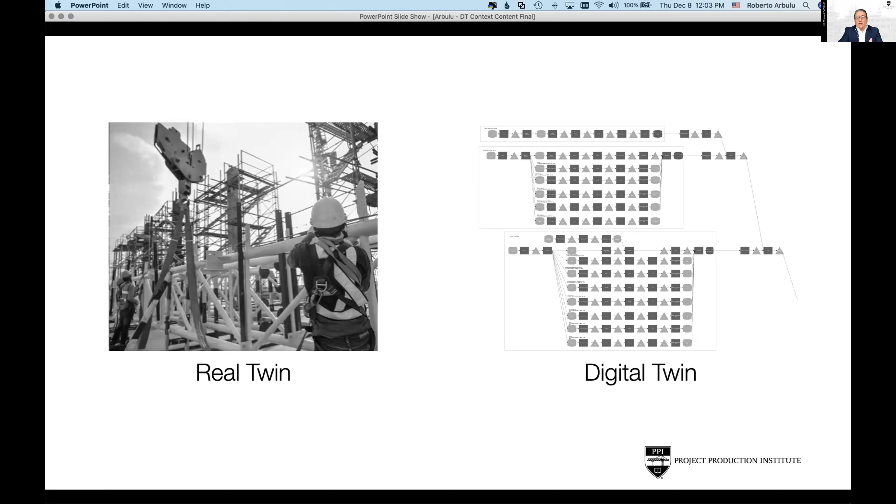We don't have the means in a conventional way, but these days technology is enabling us to really get the concept of the digital twin and make it a reality, digital twin of production systems. So what we're discussing here is a digital representation of one or multiple production systems, the actual production system happening for a project. And a link that is actually a real-time link back to the model, providing an analysis automatically using operation science, for instance, and determining what the optimal behavior should be of the production systems, either before we have an operating process, or during the operation of a given production process.

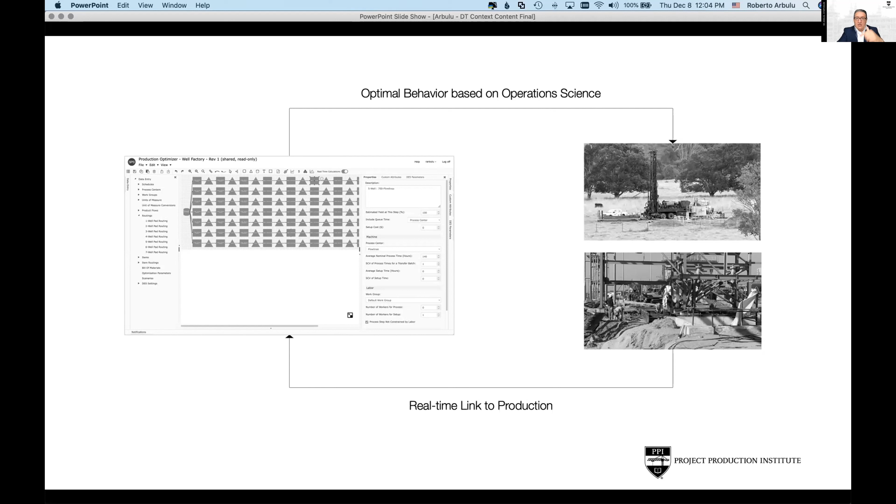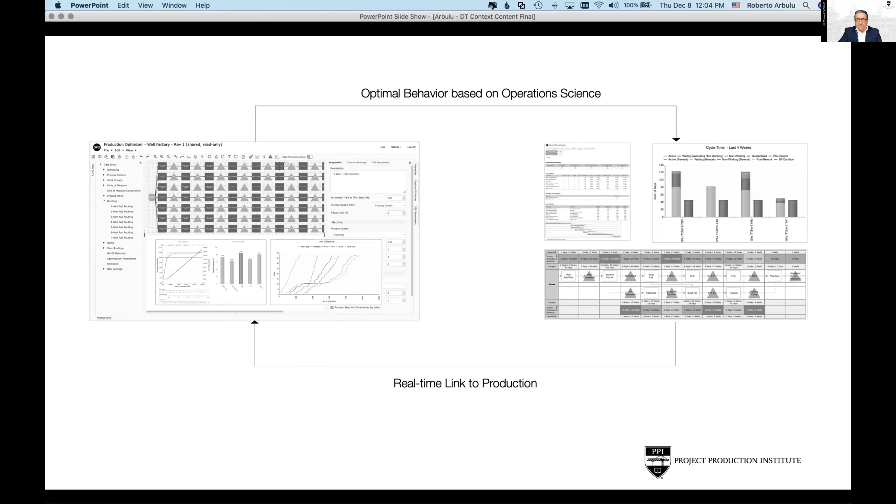Now we will take it to the next level. This is part of the framing I wanted to do for our audience today: because these days we have access to a variety of technology that enables us to capture data about current performance and transfer it, we can now talk about a vision called intelligent production, where we can have production systems that automatically optimize themselves, as long as we have this connection between the virtual and the real production system, using operation science, for instance.

This could be technology attached to pipes, could be technology attached to the Internet of Things. And then we get closer and closer, as Gary mentioned in his opening remarks, to the idea of a digital twin of project production systems. At the end, we're talking about having a model, something we can visualize of what that production system is, and once again, using technology as a means to connect it and have a virtual digital twin of the production system.

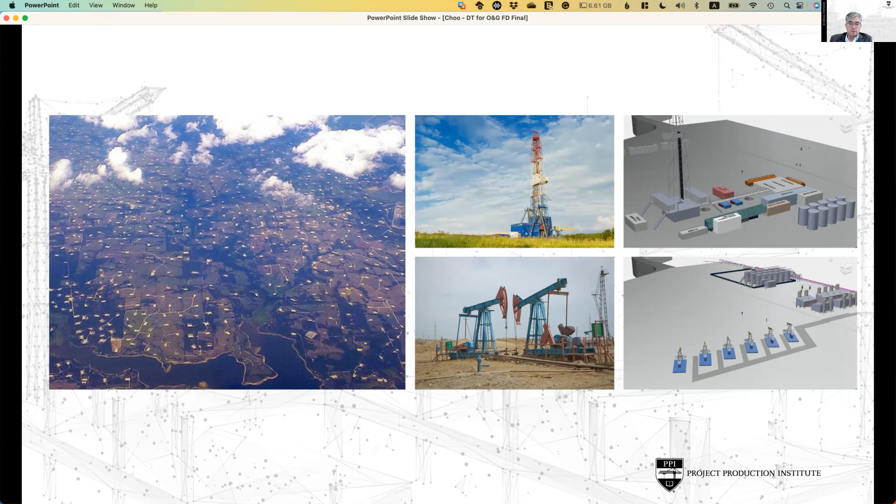The digital twin is very much focused on the 3D modeling aspect of that work. As Roberto already described, what we mean by digital twin is the actual production process that takes the wells and pads from the planning activity to the point of being put online. This is a very simplified view, but regardless of who you are in the process of developing an onshore unconventional well, this is pretty much the process everybody goes through.

This could be broken into three different steps depending on the different rigs you use. You can have multiple completions processes, multiple hookups, and then the main pipeline as a separate item that gets connected to the site. But generally, this is the process that all onshore field development organizations go through.

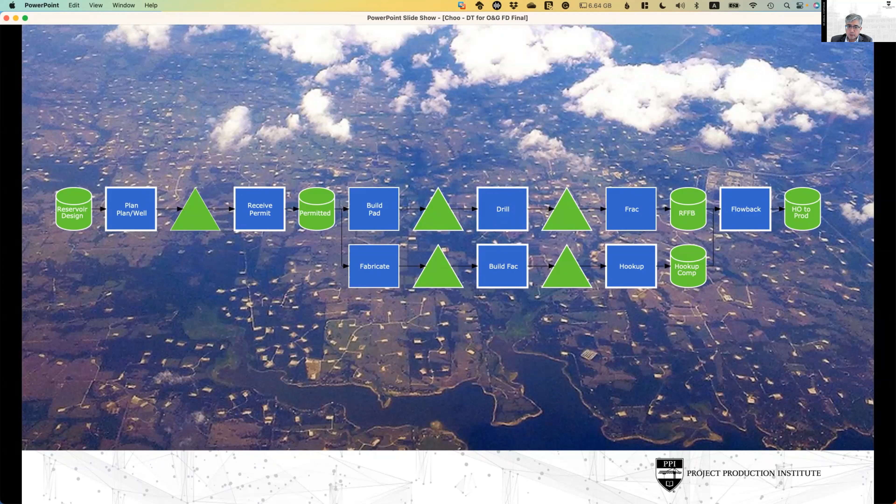So we can say that's the model of the production system. One of the benefits of making that model is to understand how we want that production system to behave, and use the actual information of how the work is getting done to inform the model. So this can be a living system.

For example, if you know the duration, the capacity, the resources you're going to have, then based on the number of wells you're trying to put online that year or future years, you can determine the WIP targets, stock targets, and required number of resources to achieve that output. That becomes something you're using to control whether you're ahead or behind in terms of your WIP—not in terms of time, but above or below in terms of your WIP and stocks.

Now, this is something we all talk about a lot—there are many organizations and systems out there that focus on visibility. And the visibility says how many pads and wells do we have in permitting? How much do we have permitted? How much do we have built?

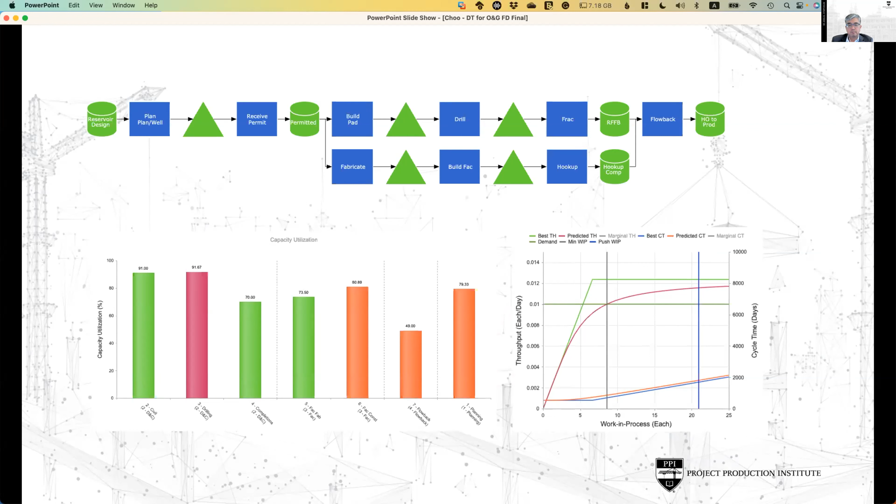Some organizations have said, no, we actually have a pretty good estimate of what we want to come out of it, or let's start with the model and then control to it. Either way, regardless where you start, what you want is now a system that operates in conjunction. By doing the model, you can understand what your capacity utilization actually is, and is your bottleneck where it needs to be, and how much WIP do you need in the system. By having the control element, you're constantly looking at your cycle time, what's your mean, what's the variance, and the median. So that allows you to understand what parameters you want to put into your model, for each of the operations you might be seeing.

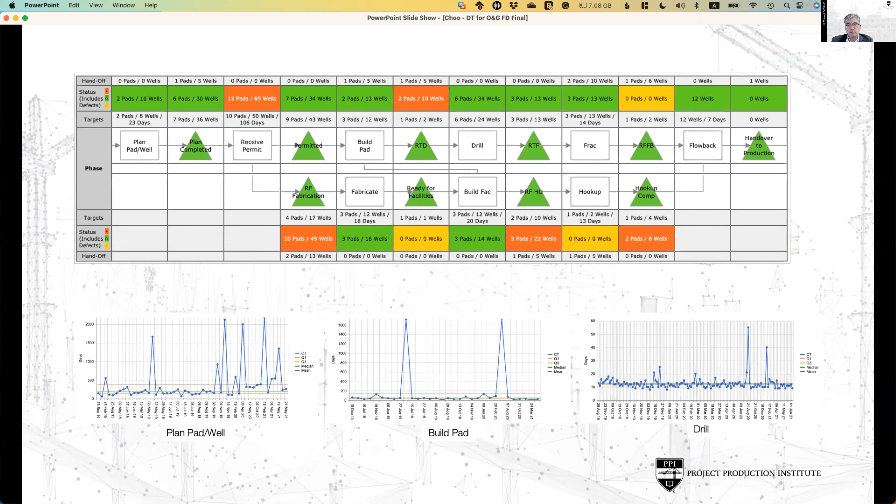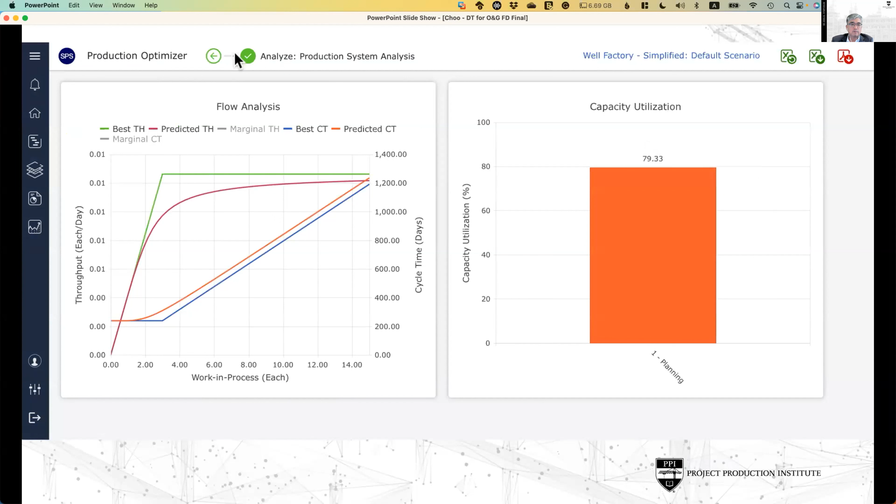One thing we had done in the past is there was a very big effort in creating the model, collecting the data, and then feeding the model and so forth. But what we've been working on with our team is the ability to build the actual modeling and optimization process into the tool that people are using to control the work, whether it be discrete event simulation or analytical modeling, so you're able to see it from one perspective. This is something that's already possible. Whether you're going to use your standard process to do this, or build a model to do this, it's already been integrated so that you can have a digital twin that operates from the modeling to the control and the control to the model.

With that, I'm going to hand it over back to Roberto, and I can answer any questions you might have after other presentations.

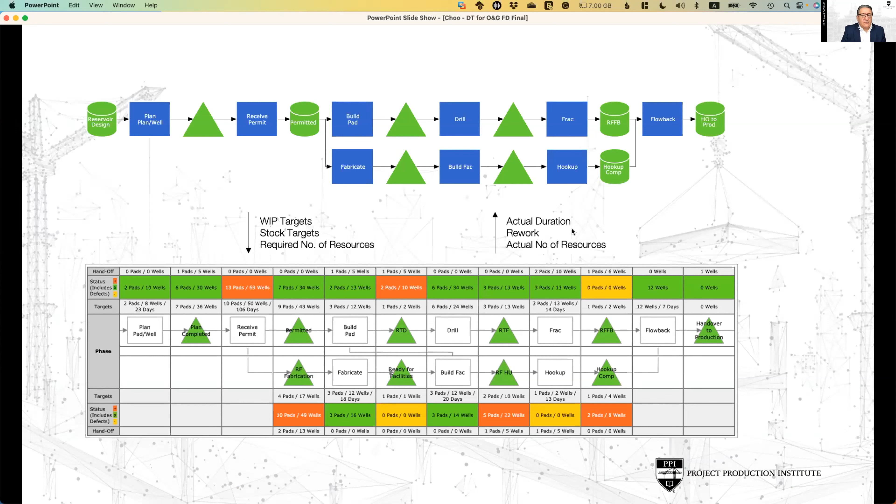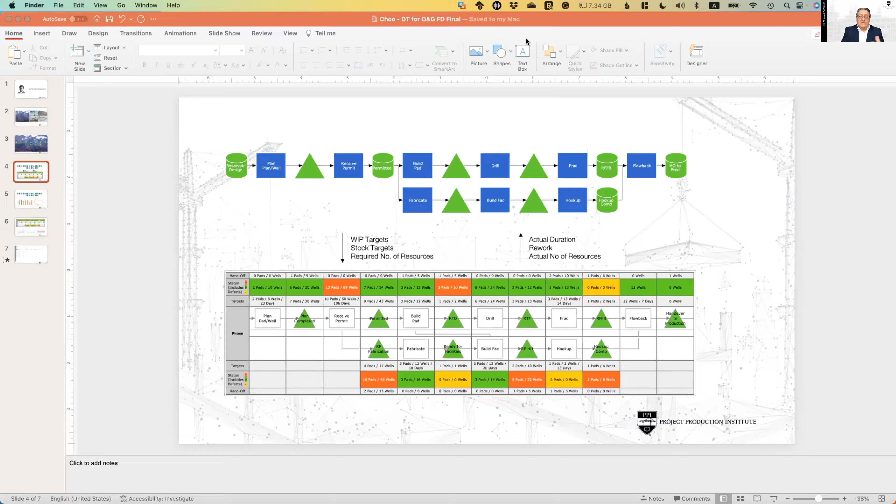Excellent, James, thank you so much. And it is important that our audience, for those of you who are not in oil and gas, also think through your own projects and how these examples might apply to your reality as we go through some of these discussions. If you're in deployments, we can say how can these apply to deployments? We have multiple things going through, and it's important to be thinking through all this. So thanks, James, for your insights.

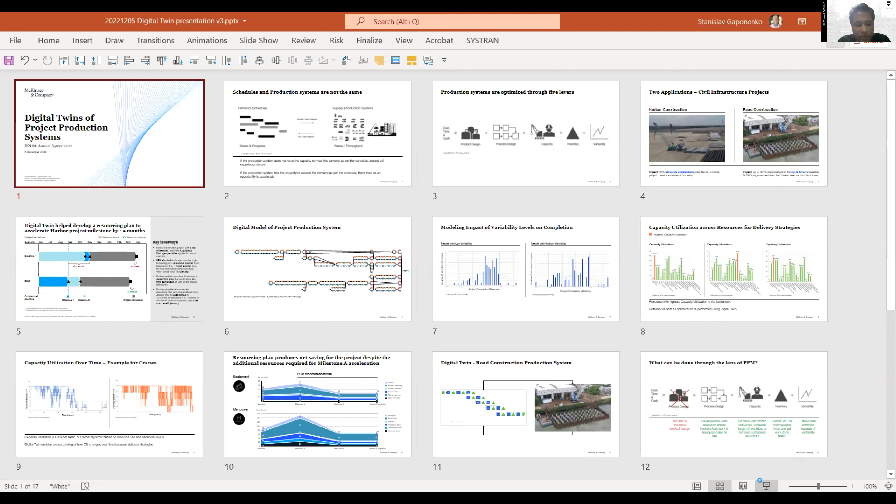What we will do today is share 2 examples of PPM application, and these 2 examples are in very different contexts. One is an example of PPM application at a package level, where we are trying to improve productivity for piling. The second application is at a project level, where we try to analyze the project in its totality and see how we can accelerate the overall project and move the completion date ahead.

These are the 2 examples we want to share today, and it's the first time we had the opportunity to apply PPM at a relatively large scale at an Asian company. We did this with one of the largest EPC contractors in the region, a diversified player, particularly large in infrastructure, with a spike in building and managing toll roads. Apart from that, it has other businesses in process industry - oil and gas, mining and smelting.

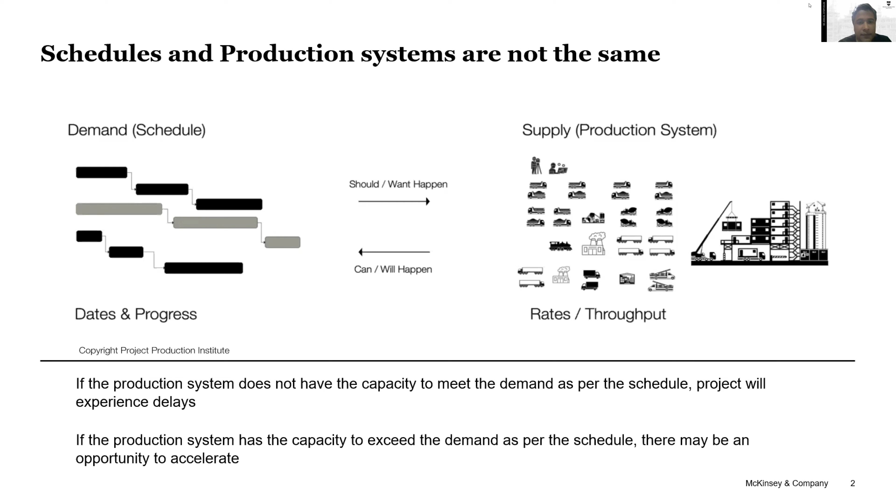That's where we came in. There were a few projects for the client that were not running on time, and we picked 2 of them. Stas, if we can go to the next slide - we tried to look at it around 5 levers.

So looking at the product design, the process, capacity, inventory, and variability. I think particularly important here, which was very interesting for the client, was the point around variability, because most of the time when the client used to do their planning as well as create their Gantt charts, an understanding of variability was lacking, among others.

So we tried to look at these 5 levers on 2 projects and also to understand the cost benefit analysis. If we were to debottleneck a certain constraint, we had to add some resources, and if we were to add that resource, there was some cost involved. Whether that made sense in the context of project acceleration - that was a further insight when we tried to do the analysis.

With that, I think I'll hand it over to Stas, who will actually share the 2 real-life examples that we had the opportunity to work on.

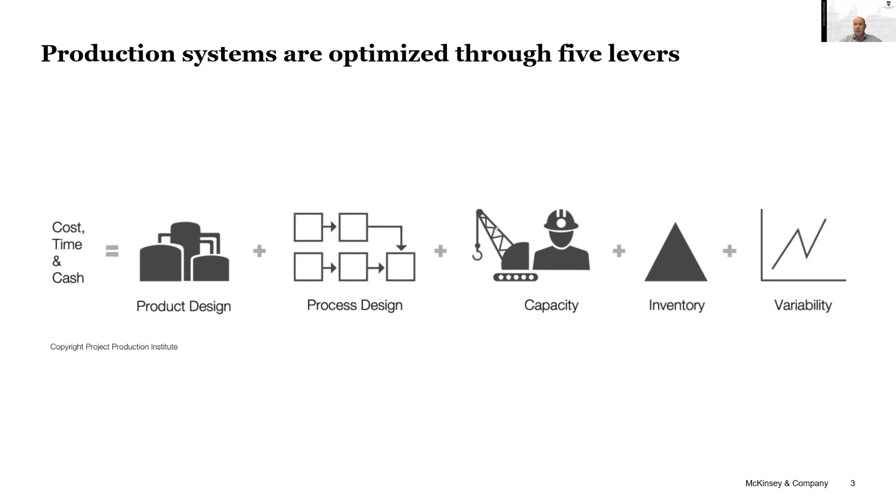I'll talk a little bit more about what the 2 applications were. The first one, on the left, was for a harbor construction project. They're both civil infrastructure projects, and the scope was relatively simple. For the harbor construction, we had some SBSP and CSP piling, capping beams, pile slabs, ducting system, and some of the fenders and bollards on the marine side.

But the project had some additional complexity in the sense that some of the work could only be done at certain times of the day because of the tidal waves and access to the areas. And when we started looking at it, it was significantly behind schedule due to various technical challenges, in particular on the piling productivity.

For the second project on the right-hand side, this was actually on a package level - a road, a highway construction project. We looked specifically at one of the sections, the main bridge section, and tried to improve the piling productivity on that.

So again, rather simple civil scope, but also limitations for the road construction in terms of the times of day when the work could be done, because this was in a residential area. So there were limitations on the noise due to piling. And despite the simplicity of the scope, that added complexity of limiting when work could be done made things harder.

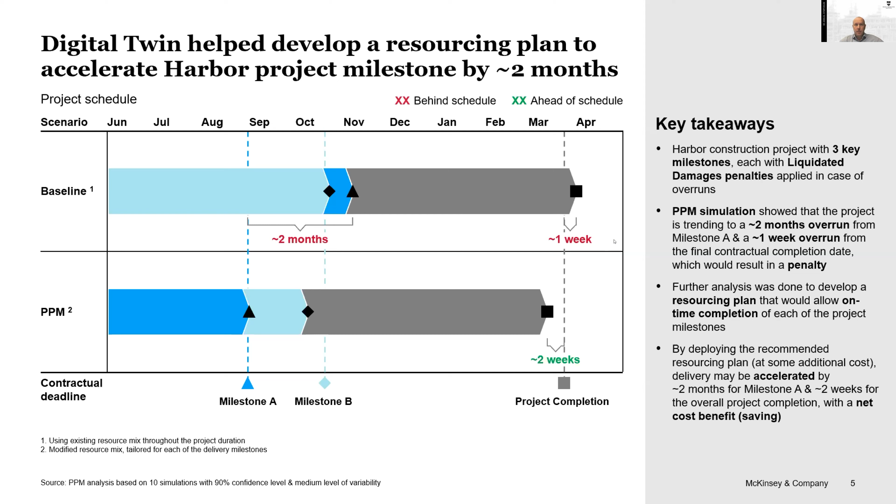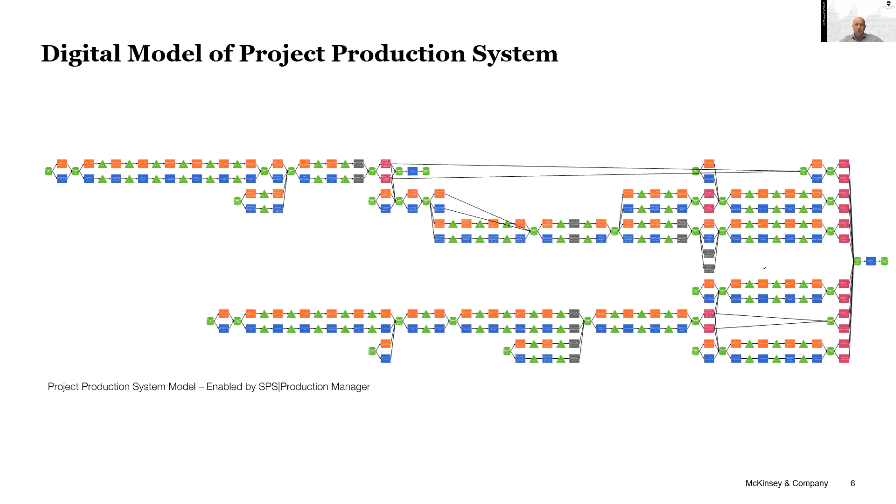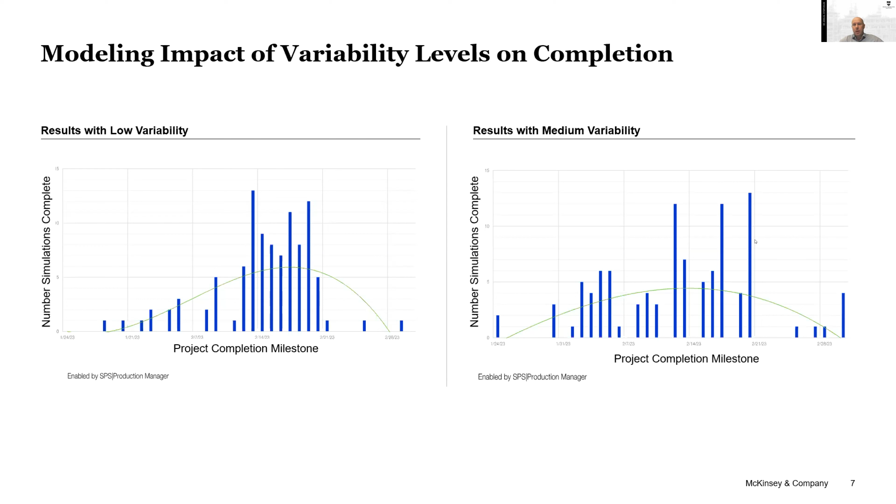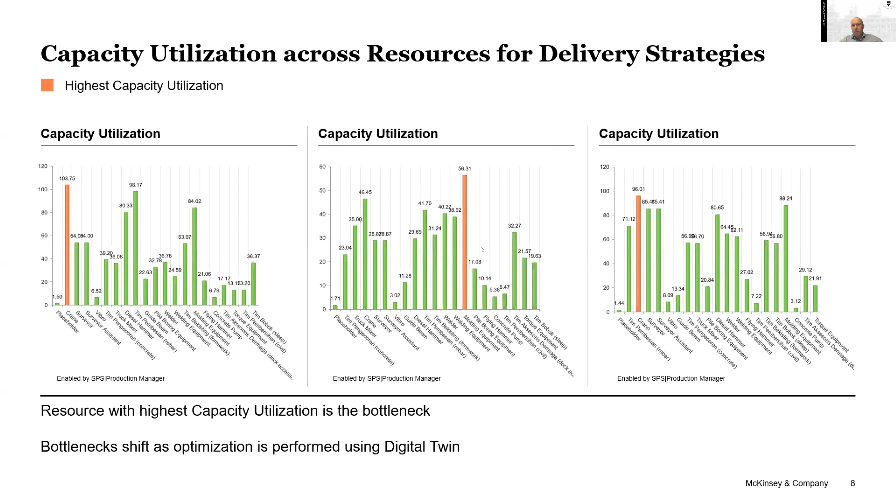So it allows us to develop various delivery strategies based on the understanding of how resource utilization and capacity utilization changes over time.

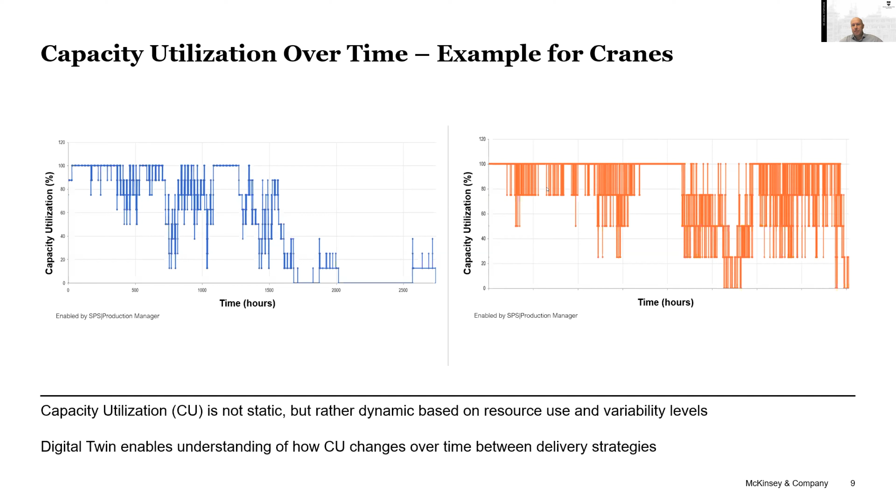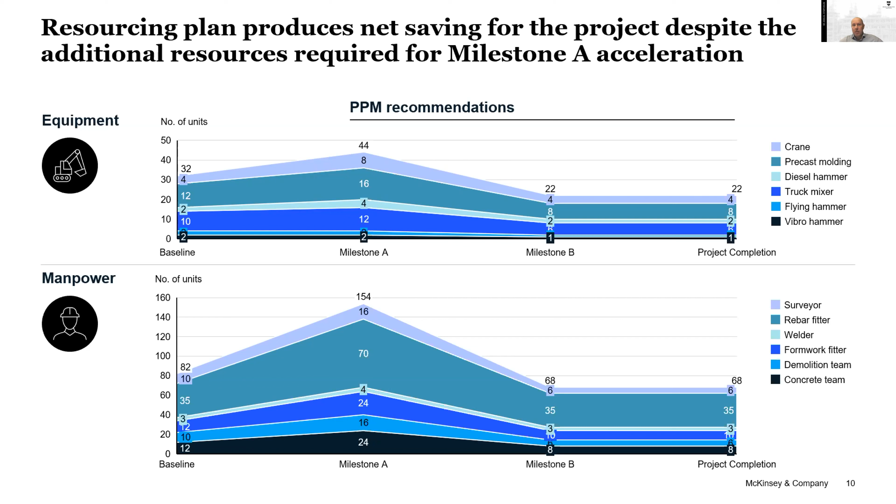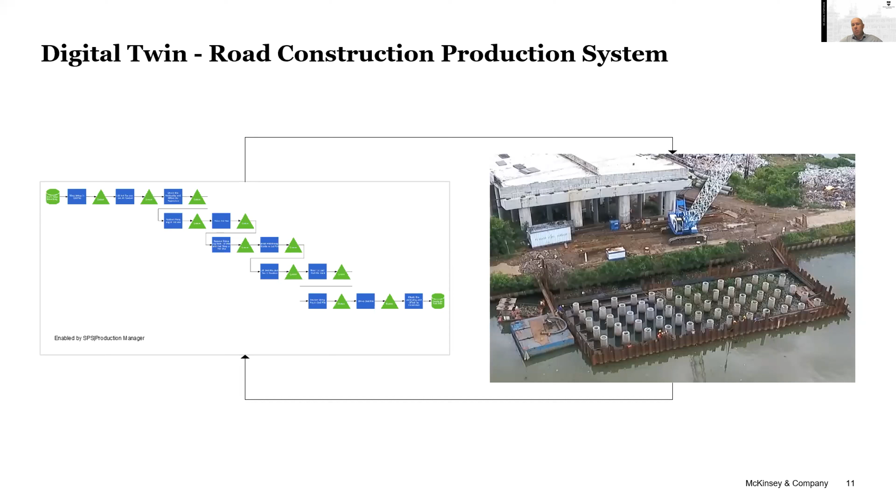We've continuously updated the model, similar to how Roberto mentioned in his framing conversation, with the actual productivity and progress rates on site, running the model over and over to give us a recommendation on what has to be changed for the best outcome to reduce bottlenecks.

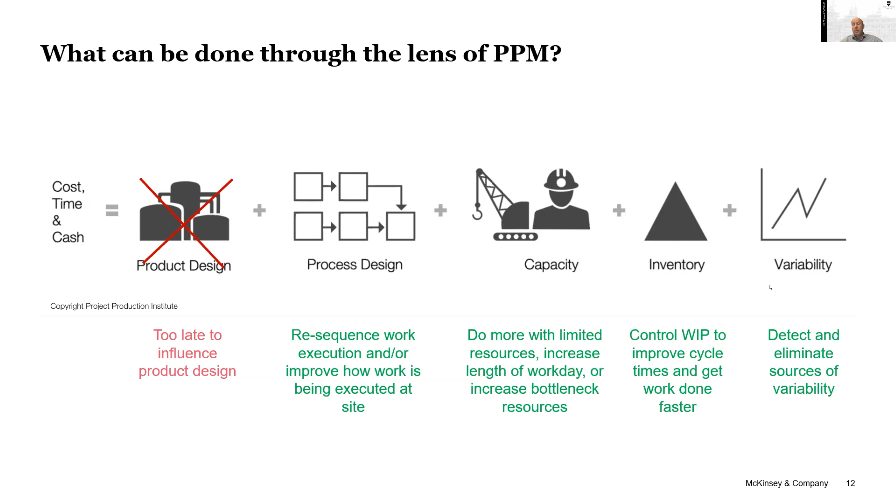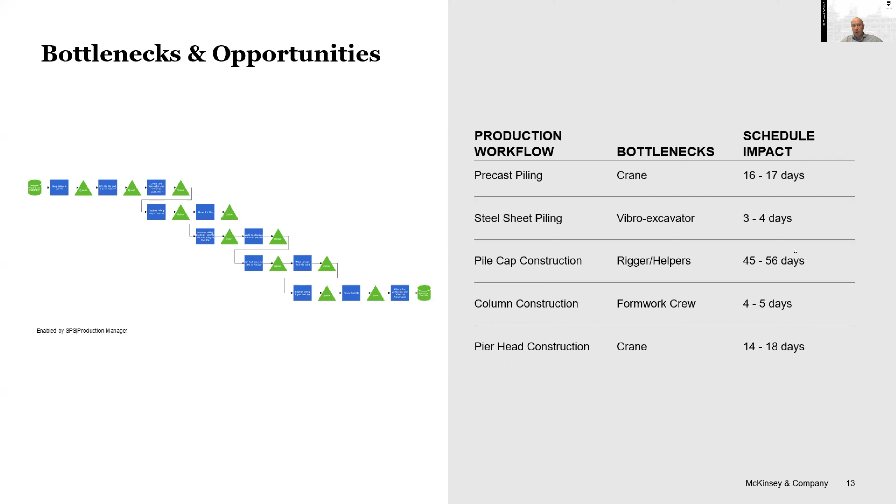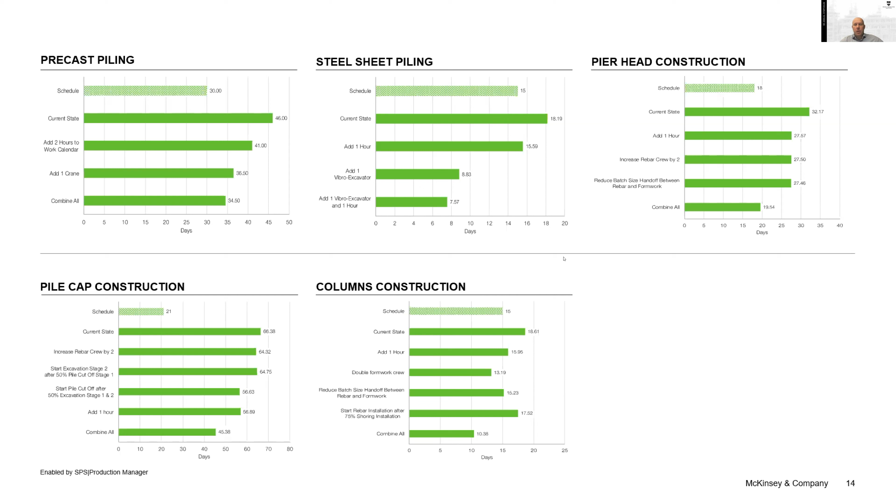Similar output from the software production manager, where we tested different scenarios or combinations, like adding an hour to shift time for a particular resource, adding another crane or a vibro excavator, or adjusting the batch size of the handoff between workstations. This continuous optimization allowed us to find an optimal combination of resources, shift time, and sequence to accelerate this project and improve piling productivity.

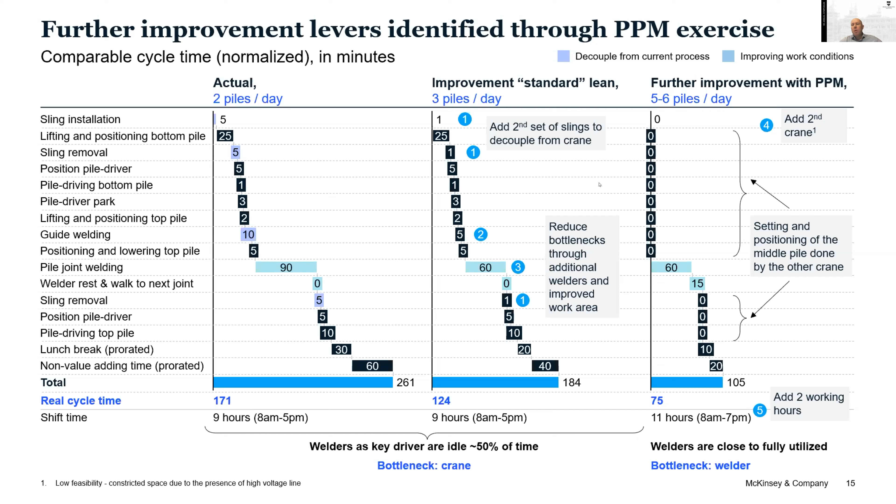And I think the last page just shows the summary of the impact and the different opportunities or levers that were applied. As I mentioned, they essentially fall into 3 categories.

One was the addition of resources, whether cranes or manpower, but knowing exactly when, where, and how many should be added so that the cost does not increase significantly.

We've looked at the shift pattern and the work calendar, adding a couple of hours for certain types of resources. And lastly, we've also looked at...

...the sequence of work and the size of the batches of the handoffs between the different workstations. And the impact for different levers is shown on the right hand side.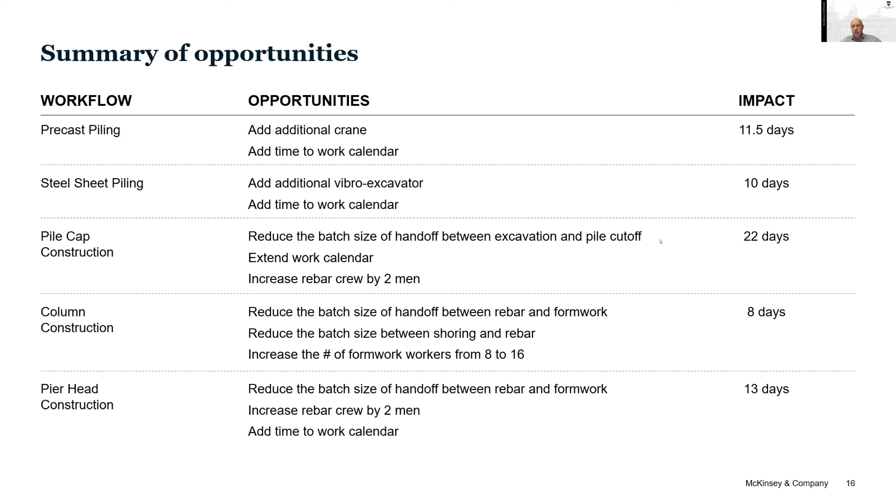So I think in summary, the main takeaway for us was that even in rather simple civil infrastructure projects, the application of a digital twin can certainly bring value, whether applied at a package level or at an overall project level.

I think it also allowed us to build that library of benchmarks that Choo mentioned in the beginning, which also then became a reference point for the client going forward with similar projects in the future.

Thank you very much, Roberto. I think that's what we wanted to share today. So happy to answer any questions, or if not, we can move to the next presentation.

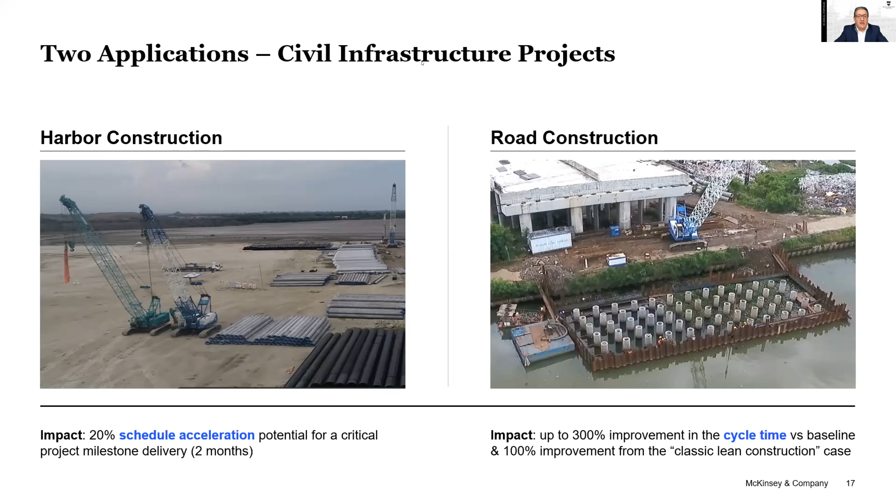Stas, thank you very much. Very, very impressive, and Choo as well. Thank you guys for joining us today and showing your work and what organizations can achieve through this methodology, this technology, because it's really not just a methodology, it's a combination of a given technical approach and the technology to get to the digital twin. So very, very impressive. So we invite James Choo to be on video and audio again with us, please.

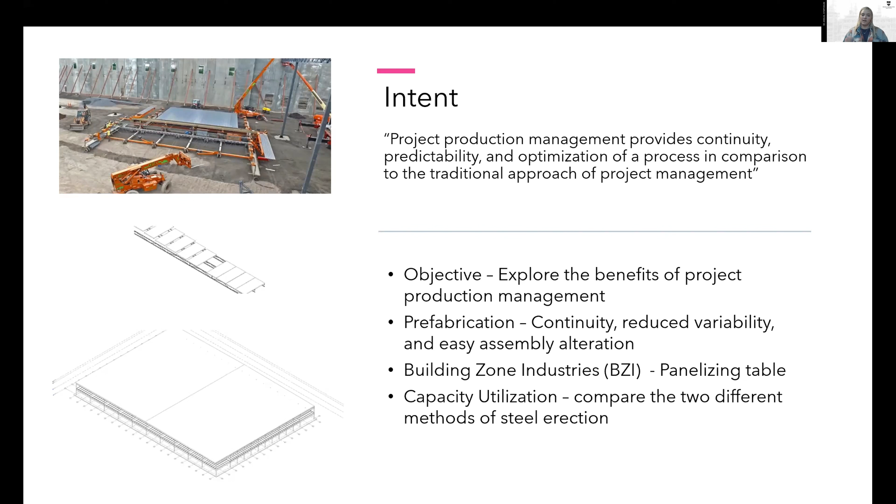My research then focused on capacity utilization. I wanted to compare the two methods, traditional stick-built versus this new on-site prefabrication style of steel erection, with an emphasis on capacity utilization.

My methodology began with a main constant, which was creating a warehouse in Revit. The warehouse was comprised of 2 stories, 224,000 square feet, and made of 140 bays. The bays were about 40 by 40 feet, with 6 joists and 32 metal decks in each bay, plus traditional columns, girders, and beams.

After I had that model and could apply it to both types of steel erection, I interviewed BZI to get their production rates and durations. I produced this Revit model for them, and they gave me a duration of about 10 days to complete a warehouse of this size, including all the detailing and assembly items.

They generally complete about 35,000 square feet per day in their steel erection. They average about 40 to 45 of those panelized systems on the panelizing table per day. It takes about 10 minutes to create that panel system, and about 3.5 to 7 minutes to transport it from the panelizing table to an actual bay and then place it.

I took that duration and those production rates and created, in PPI's process mapper as you can see on the screen, the on-site prefabrication model and the traditional model. I put those production rates into both so they could be applied, then ran through the system to see what would happen when applied to both methods, so I could compare the capacity utilization for the crews working on it.

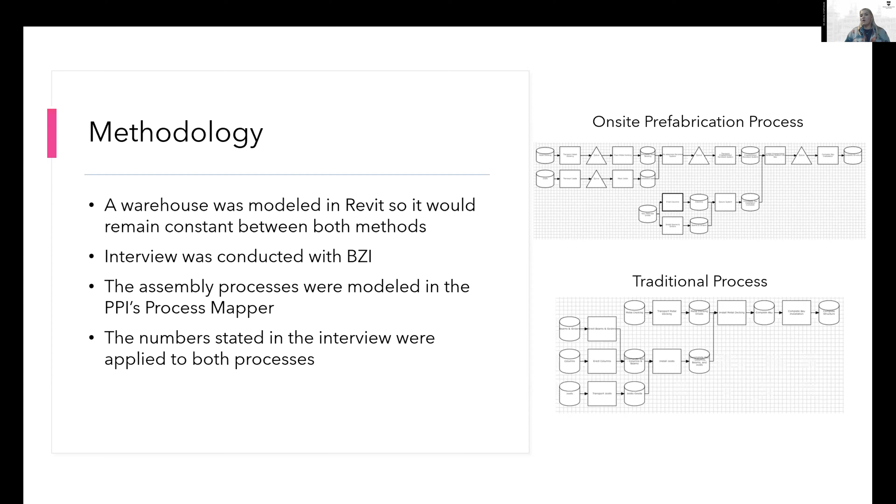My results basically concluded that capacity utilization was reduced for the on-site prefabrication in comparison to the traditional stick-built method. A major difference is that BZI displays reduced capacity utilization in the areas of transportation, joist installation, and bay erection.

Differences I also want to point out are the differences in crews required to place the joists and metal decking on the panelizing table versus being raised at an elevated height, and it also requires different transportation styles. However, I could still apply those production rates similarly to each style and method.

I also want to touch on the fact that reduced capacity utilization means that the crews are being utilized less to meet those demands of production.

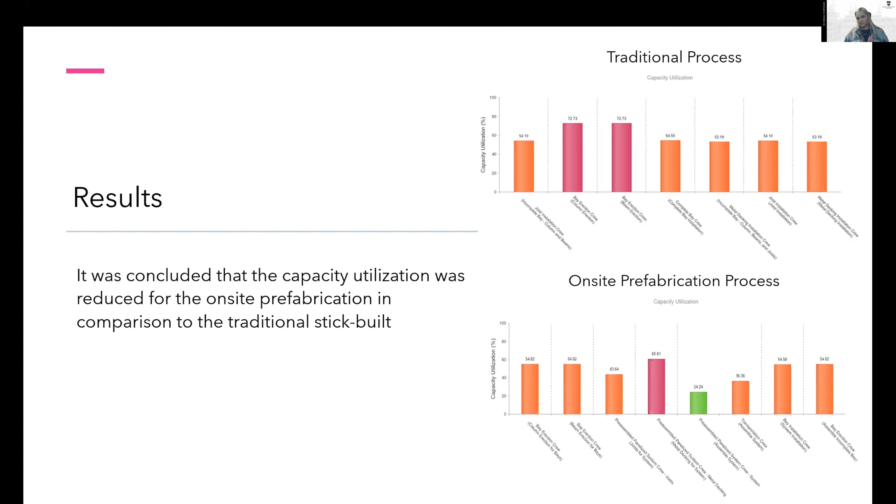And so continued exploration, I've also reached out to BZI. They have actually referenced my research in some articles. I have that linked and will be able to show you as well. They're continuing this idea of looking at the assembly process.

A lot of companies we're seeing are implementing project production management to actually view the operations and systems, so they have a better idea of variability and can control that variability and provide better continuity of their product. One example is they implemented what's called a WallMaster, which allows IMP installation system to enhance safety, efficiency, and simplicity of IMP walls. Again, similar to that panelizing table, it's performed on the ground and then lifted into place.

Just to show you a little bit of their website, referencing the research. They've also found that this provides better outcomes since their workers are not at high areas, and they're not in the air for as long, which provides better safety for them overall. And again, as I mentioned, it reduces their capacity utilization of their crews.

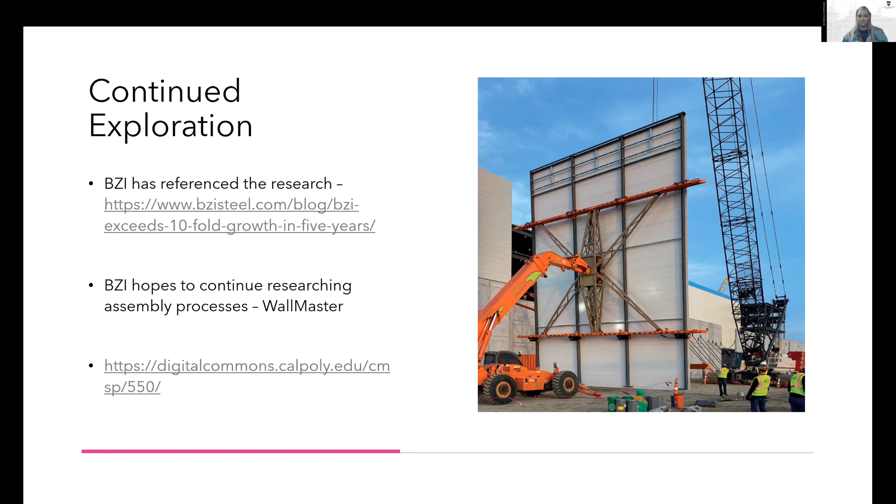Corey, thank you. If you're sharing the link, we're not seeing it. If you want, once we share the slide deck, I believe it can follow the link. I don't believe it's shared on screen, but I can go back if you'd like. Let's take a look quickly, just so our audience can see the impact of your work. Guillermo will be with you in a minute. Can you see it now? No, for some reason it's not coming up, but that's okay, the link will take you to it.

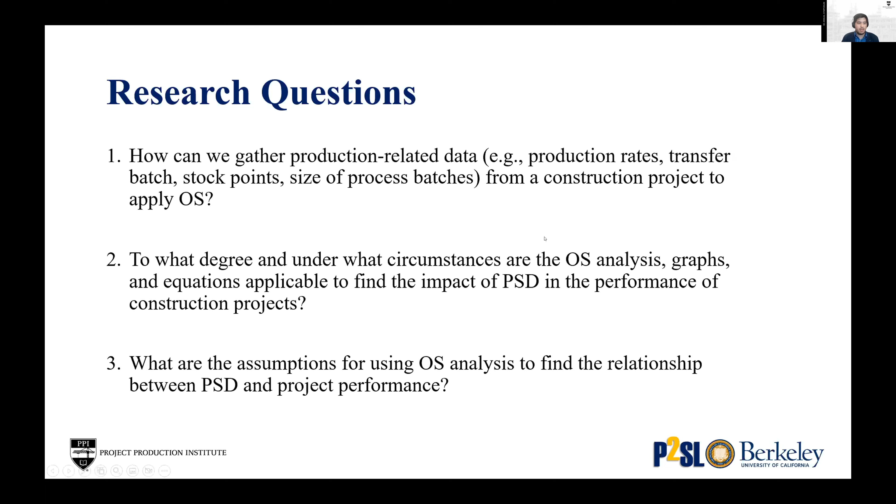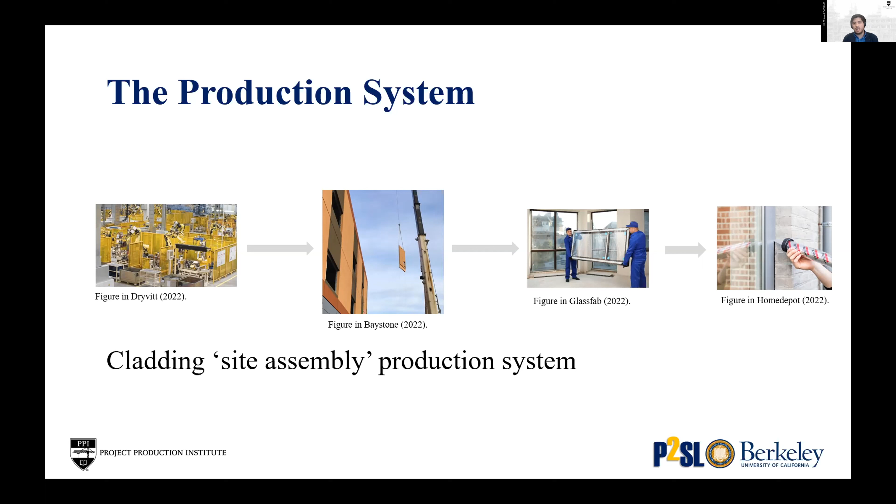The production system that I'm going to talk about is a cladding on-site assembly of an off-site production system. We are going to talk about, since the components of the cladding system arrive to the project site, how the EIFS panels are installed on the building elevation, how the windows are assembled through the openings of these panels.

And finally, how these components of the cladding systems are caulked in the building elevation. As you can see in this slide, the process that I mapped is divided into three principal chunks of work: the first is related to the EIFS panels installation and inspection, then the windows installation and inspection, and finally the development and inspection of the caulking. I'm focusing on understanding the demand under this production system and how it behaves under these circumstances. I use a demand of 16 EIFS panels per day to be installed.

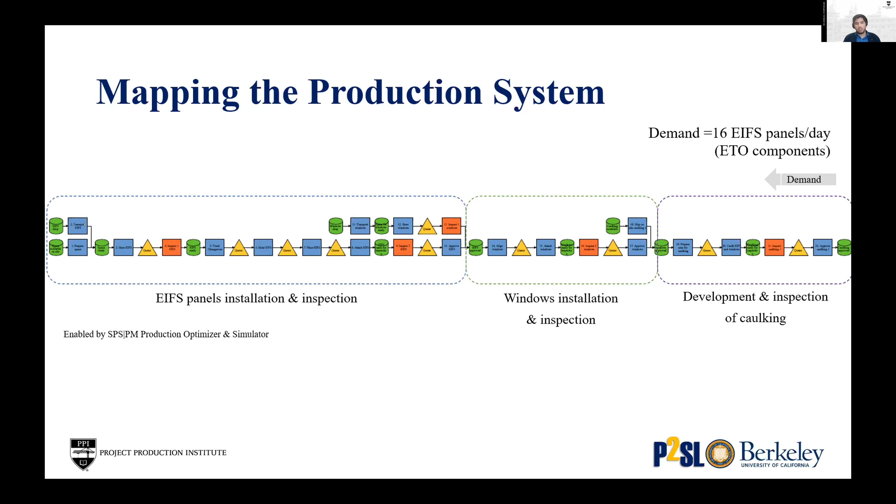It's important to mention that these are engineered to order elements, and this map has been enabled by SPS Project Production Optimizer and Simulator. An important part of the process mapping is to understand how to collect data, in this case, data related with production parameters.

Throughout the different interviews and meetings that I have with the project team of this construction process in Northern California, I collected the project plans.

And by using the 5 levers of project systems optimization by PPI, I try to understand what assumptions I have to make in order to provide reasonable assumptions to understand the transfer batch, the process batch, demands of each of the items flowing throughout the production system, as well as the process rates and process times of the different steps involved in this production system.

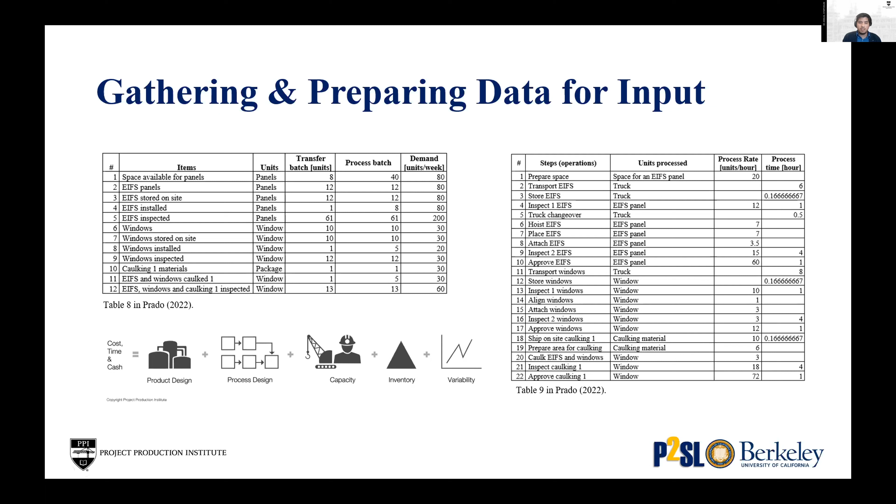These two tables represent the data and the input that I use for developing this production systems model. Then we have the outputs under the demand of 16 EIFS panels per day to be installed. As we can see in the first graph, the relationship between operation science metrics under Little's law are explained by throughput, work in process, and cycle time.

This green horizontal line represents the demand of 16 panels per day, and these other green lines in the upper part of the graph represent the maximum throughput. As we can see, since the demand is below the maximum throughput, the production system can respond positively to the current demand. We can see as well in the second graph the capacity utilization of each of the resources.

The bottleneck in this case is the last resource, with a capacity utilization of approximately 83%. And we can understand these metrics better in this table below, which shows the operation science metrics: work in process, throughput, utilization, and cycle time, and how that relates with project management metrics, in this case, duration.

I also included the real duration of the different processes included in the production system, which is this last column that validates the results of the model, since those two pieces of information are similar to each other.

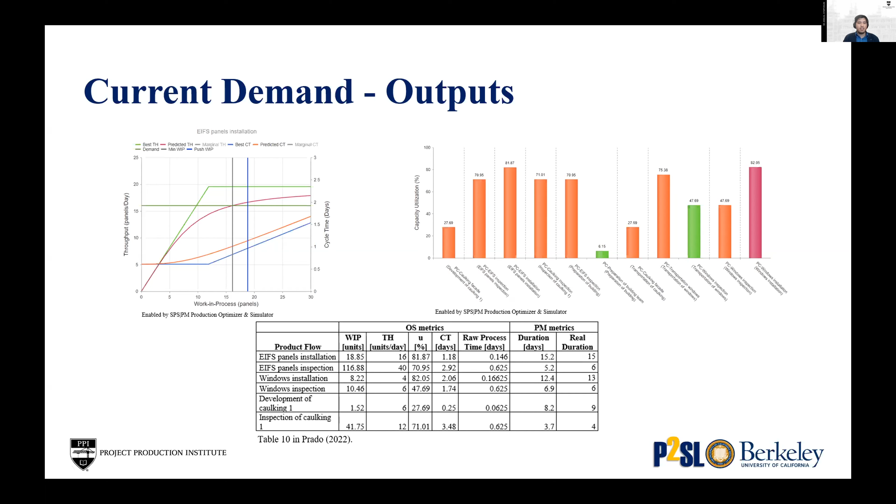But then I changed the demand to something larger. I enlarged the demand, and instead of 16 panels per day, I used 20 panels per day to see how the production system is behaving under these new circumstances.

As we can see in the first graph, the demand now is above the maximum throughput line, which means that the production system, as it was designed before, cannot perform positively under these new circumstances.

This can also be understood by the second graph, which shows a red line under 100%, and two of the resources used for these production systems are going above that. As we can understand from Kingman's equation, when a resource is going closer to 100% or above that, we are going to see cycle times that are very large, which is the result I am showing in this table below, in which the work in process and cycle time are going to infinity because the utilization is larger than 100%.

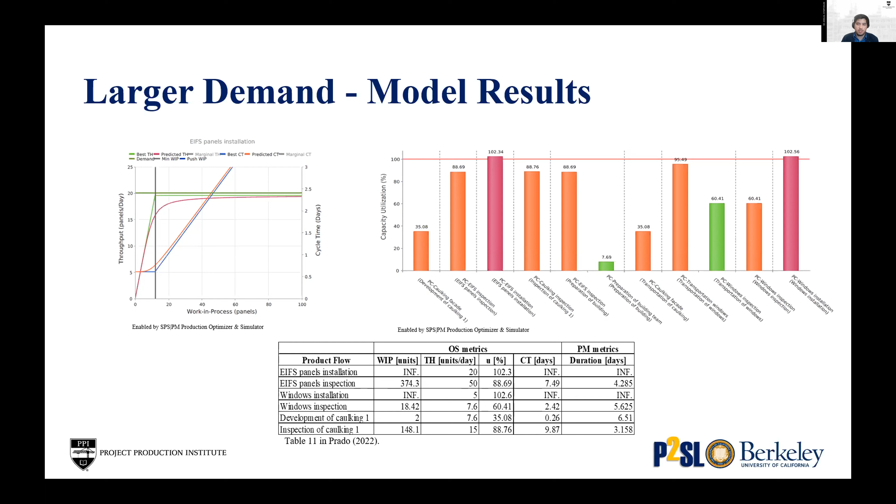Between these two results, I conducted a sensitivity analysis of the demand. I developed 11 runs, changing the demand of all the items of this production system to understand how the demand makes changes in operation science metrics and project management metrics.

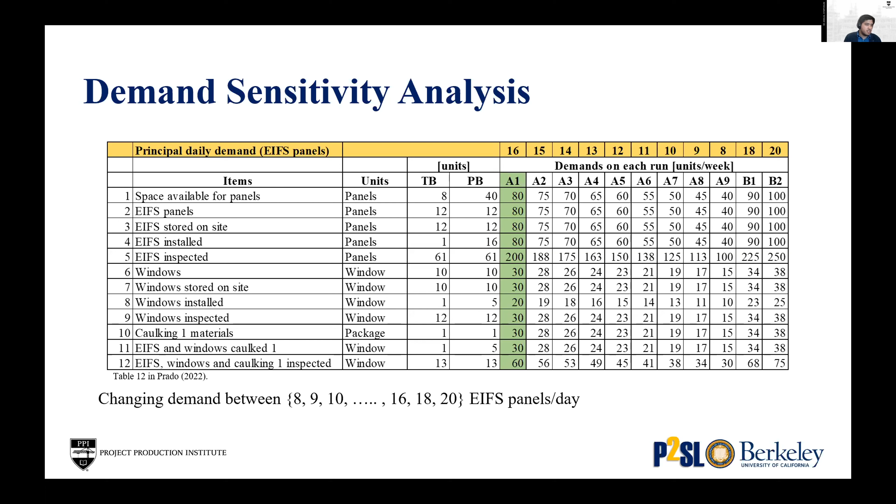These results are shown here, part of them. One important outcome of this analysis is to see how the bottleneck, which are those orange cells, change from one run to another, which means that it's not always the same product flow that causes bottlenecks on the production system. We can understand that by seeing how the orange boxes are changing from each of the runs of the sensitivity analysis.

We can see on the second graph how the different operation science metrics are changing by a different demand, which helps us to understand how we can impact these metrics positively and therefore have a better project performance.

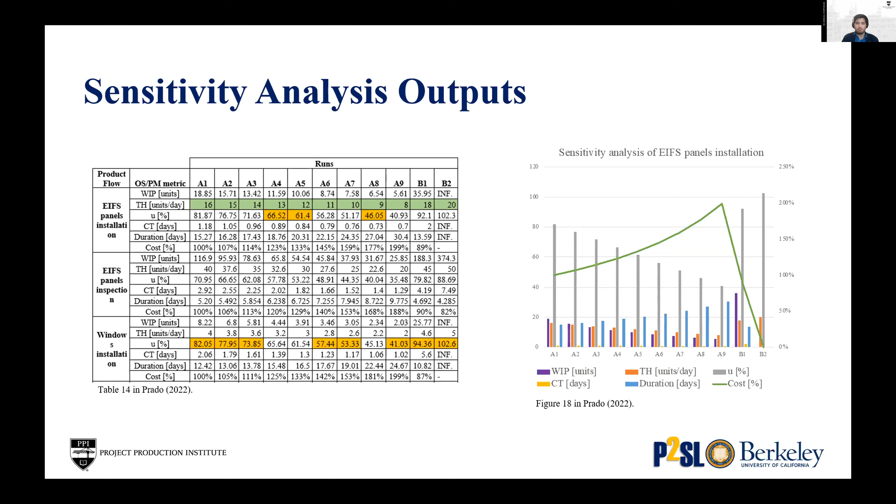Finally, the main conclusions of the study are that we can collect data by making reasonable assumptions from the project side to understand the production parameters that we have to include in our production systems models. The operation science analysis equations and the graphs, therefore, are applicable to any type of construction process.

We conducted one case study, but we believe that this can be expanded to more production systems in construction. And any change in the demand causes different behaviors in the production system, specifically in utilization and cycle time.

If we want to perform positively under these new circumstances, such as the enlargement of the demand, we will require some optimization and adjustment, probably by improving process rate and process times. These were the most important outputs.

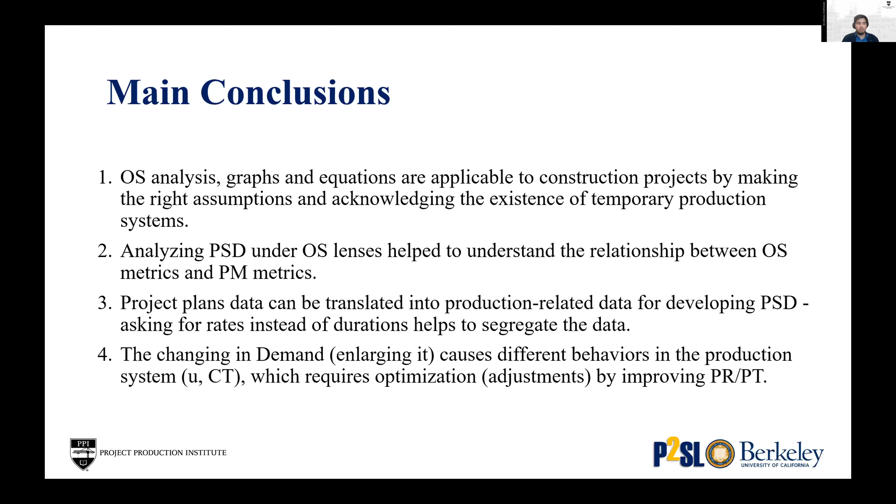Thank you so much, Guillermo, and also Corey. I think it's impressive work coming from two different universities in collaboration with PPI.

A young person like Corey, from the university, now working in the industry with all these ideas about capacity utilization. Guillermo, a bit more seasoned person professionally, having worked in construction, is also learning this at UC Berkeley and incorporating it into his personal toolkit. From a PPI perspective, this is what the Institute is looking to achieve with universities and younger generations: the concepts of operation science and methodologies like PPM are being introduced to our younger engineers, construction managers, and project managers coming to the industry. Excellent work to both of you, keep up the work, and thank you so much for being with us today. We really appreciate it. Thank you both.

Before we move into the next session, I'm going to steal a couple of minutes. I know we have Martin Fischer already with us, but I wanted to address a couple of comments I believe we saw in the Q&A. The first one is a question about the presentation McKinsey did. This is great, but I'm not completely clear whether the impact slides were potential impacts from the simulation or whether they were implemented and achieved.